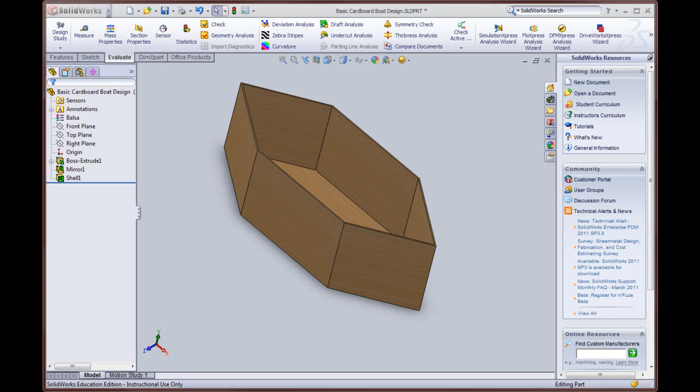Okay, we now have the basic boat created. I'm going to use a tool called Configuration Manager, and this allows me to look at the boat in several different configurations. One configuration is I want it actually shelled out, so it looks like the actual finished boat, and the other is I want it before it's shelled, so I can actually take the entire volume of the boat and let SolidWorks do the calculations for me.

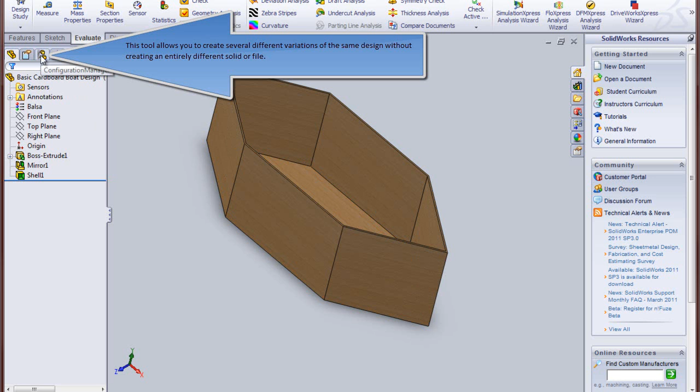So I'm going to go over here, I'm going to select the Configuration Manager tab right there. I'm going to select this right here, and I'm going to click Add Configuration. And the name of this configuration is going to be Basic Boat Not Shelled. I just give it a name that kind of defines what it looks like.

Now you can actually do some advanced things here. You can add additional color and make it look a little bit different so you know what configuration you're actually looking at. I'm not going to worry about that right now. I'm just going to go ahead and create. And now you notice under configuration we have two. We have the default and we have not shelled.

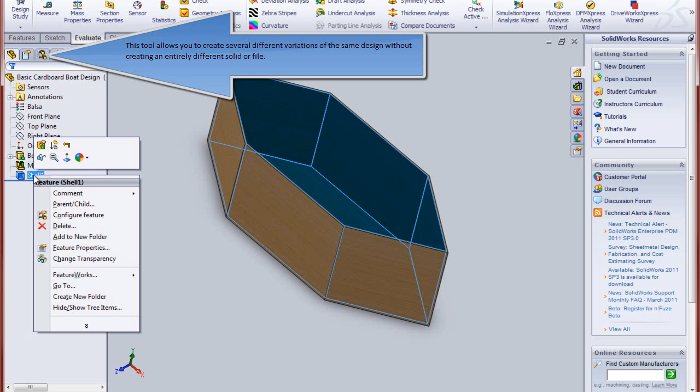So I'm going to double click on that, make sure it's active, come up here and select the configuration tree there, and now I'm going to go back to the shelled part and I'm actually going to suppress it. Okay, so now the shell is suppressed, you can't see it. Go back to Configuration Manager and let's look at the basic cardboard boat design. Double click on it and it is shelled out.

So we can jump back and forth, and you notice as we do this, if we go back to this right here and look at mass properties, it's going to give you a different answer because basically it's different. Your center of gravity is going to be pretty much the same, but your mass and your volume are going to be different. So that can be a little bit helpful.

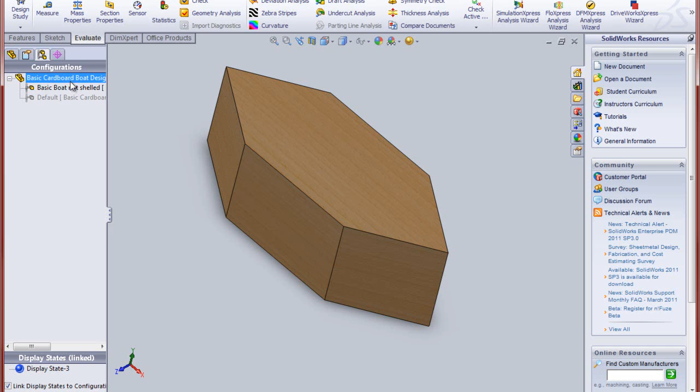Now the next thing I'm going to do is double check the hand calculations here and find out where my freeboard is. Or actually what I really want to find out is where is my water line? How far is this going to sink in here? I'm going to use the same values as I did in my hand calculations. The boat mass properties say that it's going to weigh basically 11 pounds. So I'm going to use 11 pounds in my calculation.

And actually, if you want to be safe, this is the balsa, but you're going to add duct tape to it, which is going to be a couple more pounds. So maybe we just say 15 pounds. And then our riders, we have two riders, and it's probably going to be, say, 435 pounds total. So that's the same value that I'm going to use in here.

So to do that, we're going to have to find out what that is. We use 15 pounds for the boat and 435 for the riders, and that ends up being 450 pounds. Okay, so we have 450 pounds, and we need to divide that by 62.4 pounds per cubic foot. In doing so, our pounds cancel out, and our final answer will be in just cubic feet.

So let's take that value, 450 divided by 62.4, and it ends up being 7.21 cubic feet. You can take the precision out further if you want, but for our purposes, two places is going to be fine. So I'm going to take 7.21 cubic feet.

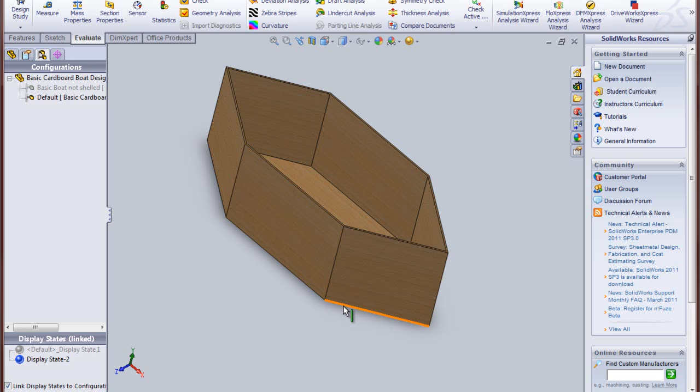Basically, from Dr. Penny's approach, you find H and then subtract for the freeboard. Well, I'm going to show you another method, and either method for a simple geometry like this is fine, but with more complex geometry, this is going to be really helpful.

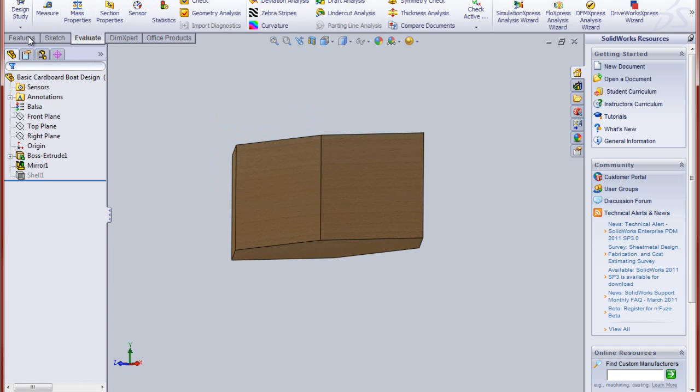So the process is, I'm going to take this right here, and I want to go back into the not shelled configuration. I'm going to come down at the bottom here and I need to create a reference plane, and I'm going to come off the bottom right there, and I want to go up. The distance I don't really know. I'm just going to guesstimate right now.

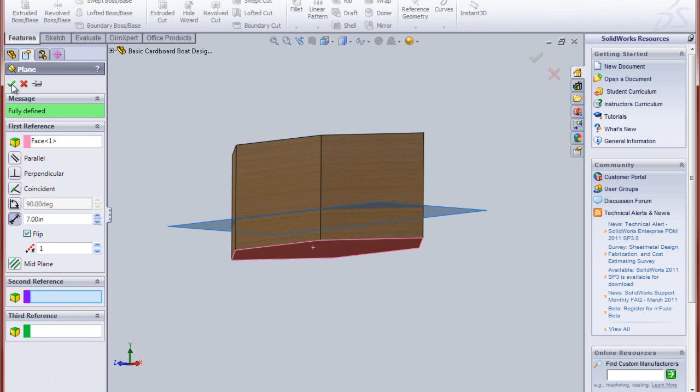Let's go say 7 inches, and we need to flip the direction and say OK. And then we have a plane coming up here, and I use this plane as a cutting plane, so I can come up here and go to Insert, Features.

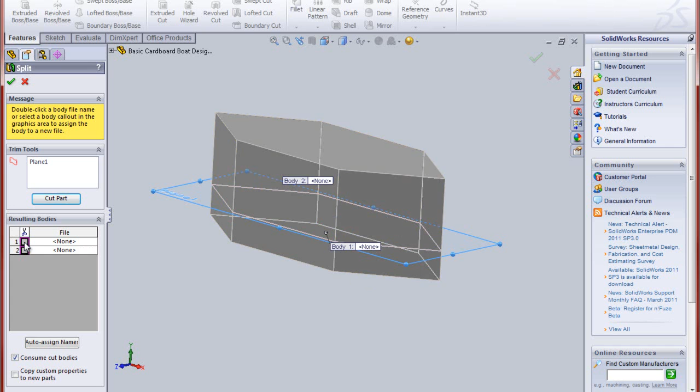I'm going to use this plane as a split tool, and I want to cut the part, and I want to take body 2 and consume it, basically do away with it. So I'll go ahead and check that. Now that's our finished part right there.

So we're going to use SolidWorks to find the volume of that. I'm just going to come back up here to Evaluate and Mass Properties, and let's check the volume here. It's in cubic inches, and that's 10,192. What we need to find is the height at 12,458.

So at 7 inches we're actually pretty close, but it's going to sink down a little bit further than that. I'm going to use this tool right here to modify that value. We went 7 inches, so I'm just going to modify that plane and jump it up to 8 inches. Evaluate.

And evaluate it and see where we're at. 11,648. So we're actually getting a little bit closer. It's going to sink down some more, so we're just going to have to keep bumping that up.

Let's just jump it to 9 and then come back down if we need to. So let's take that and check Mass Properties and see how fast this is. It is a little bit cumbersome, but it is pretty darn fast.

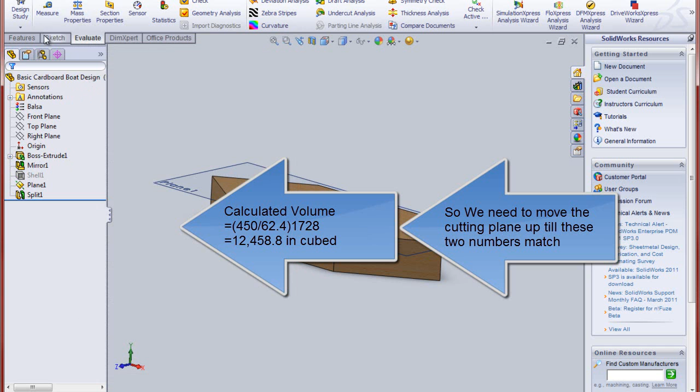12,458 is what we're shooting for. We jumped up to 13, so we're going to have to come back down a little bit. So let's try 8.5, let's try 8.6, and see what that gets us. Mass Properties.

12,521. That is pretty darn close. In fact, maybe if we just try that one more time, I think this is probably getting close enough. You notice how fast it is - it wouldn't take much to change it. But let's try...

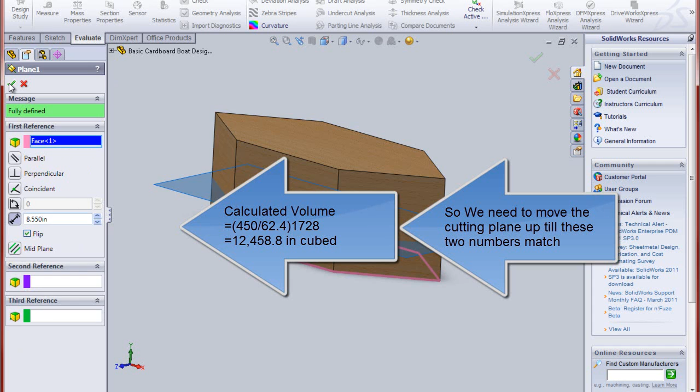8.55. Mass Properties. 12,448, and we want 458. I'm going to call that close enough for right now.

So what that's telling me right now is that much of my boat is going to be in the water. That's where my water line is going to be, and the rest of it is going to be the freeboard.

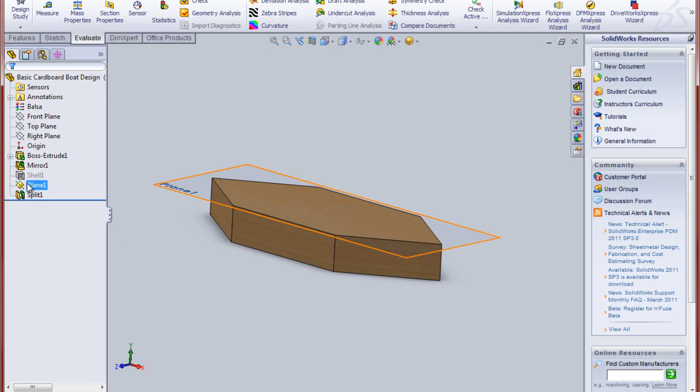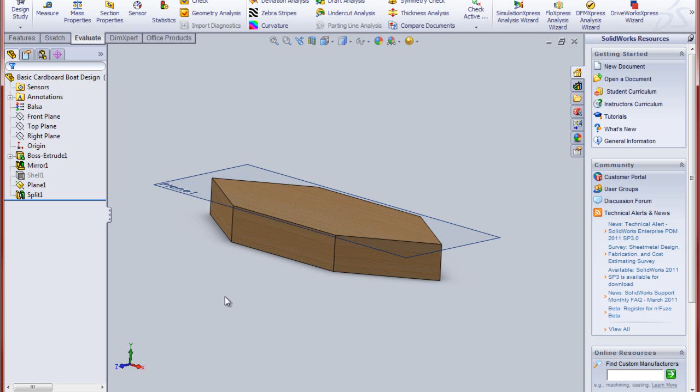So if I take that distance which we have right here, we just figured that out - it is 8.55. So we're going to take 24 minus 8.55, and our freeboard on this design is 15.45 inches, and that's actually way too much, because if you try to reach in the water and get some power into that, you're just reaching too far over. So for this design, for example purposes, this will work, but for actual design, I would cut that way down. 24 inches is too much.

So that is how you can actually calculate where the buoyant point is, and where your freeboard's going to be. Now let's just finish this up real quick.

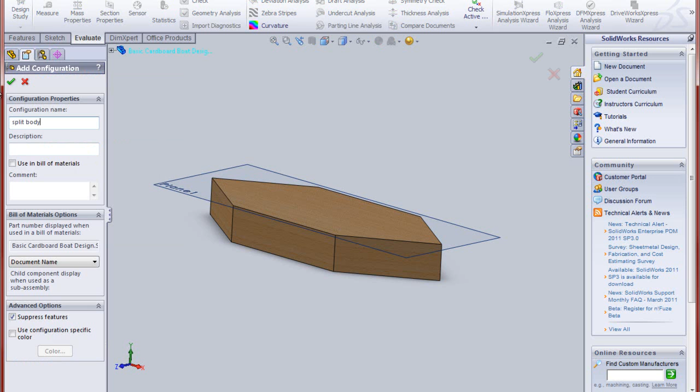I do need to add another configuration in here, and I'm going to call it split body. Because in basic, not shelled, notice right now it's showing that I want to actually modify that, and in this particular one I want to show the plane, but I don't want to show the split. So suppress that. There we have the water line, and we have the entire boat right there.

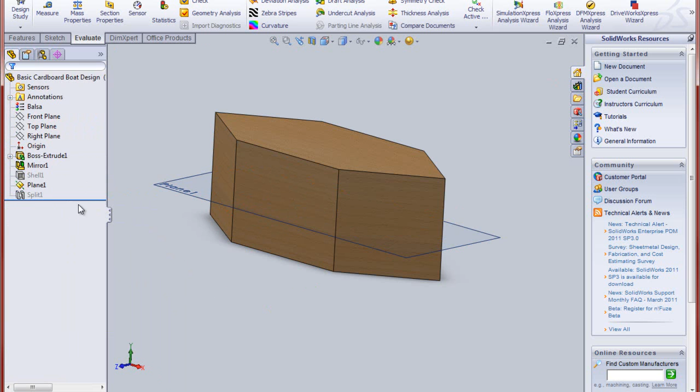So that's fine. Modify this again, default basic. I want to show that plane, so I'm going to not suppress the plane. Come back up here, split body, and there we go. So now we have a pretty good several different configurations we can jump back and forth to.